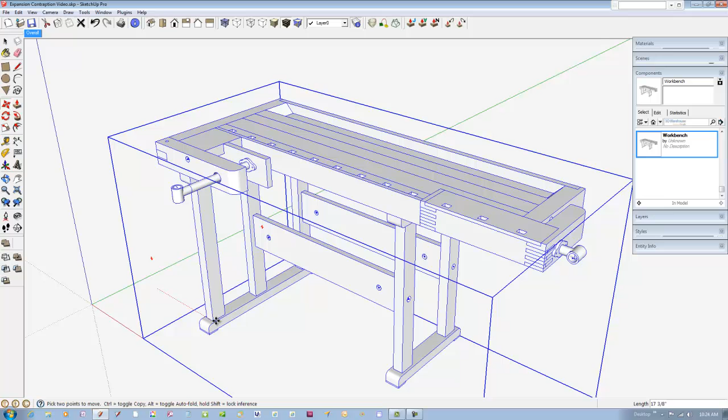To help design the adjustable support, I'll bring into the modeling space the workbench and also a copy of the dovetailed box that I need to hand plane after glue up.

I need to rotate and position the box into the desired location between the workbench dogs.

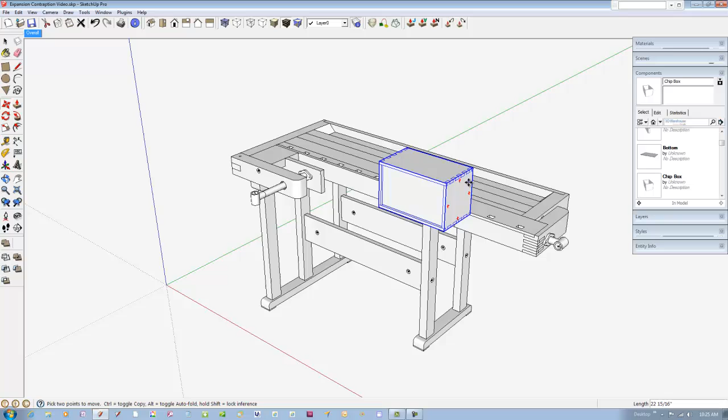Start the design of the adjustable support from this camera position. Using the line tool, draw the rectangular shape of the stile that is 2.5 inches wide and 1 3/4 inches high.

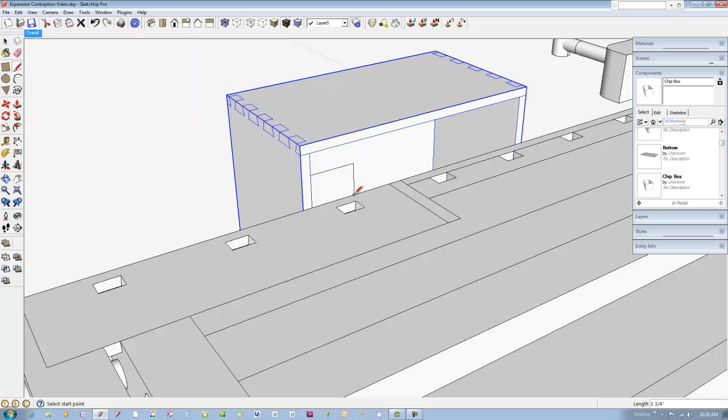Make the shape a component called stile.

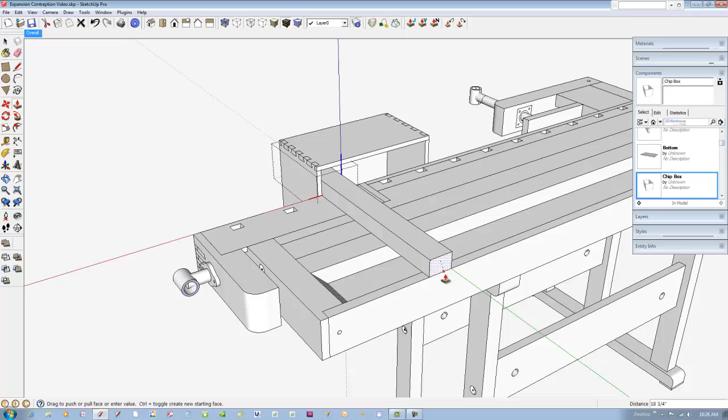Use the push-pull tool to extend the stile back into the box until it touches the bottom of the box. Then continue the extension of the stile out to the back edge of the workbench.

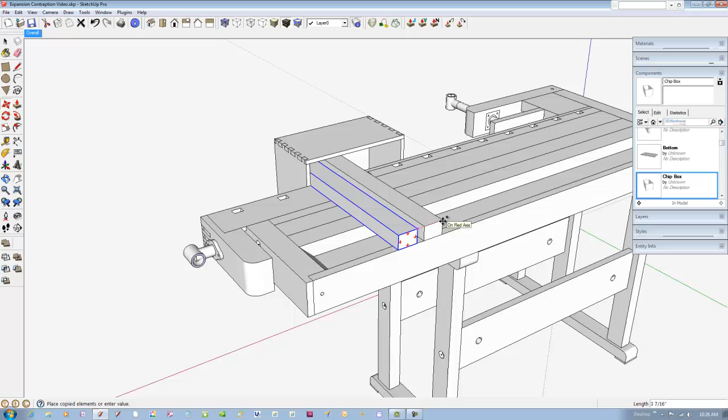Copy the stile to the other side of the dovetailed box, and flip that copied stile along the red axis.

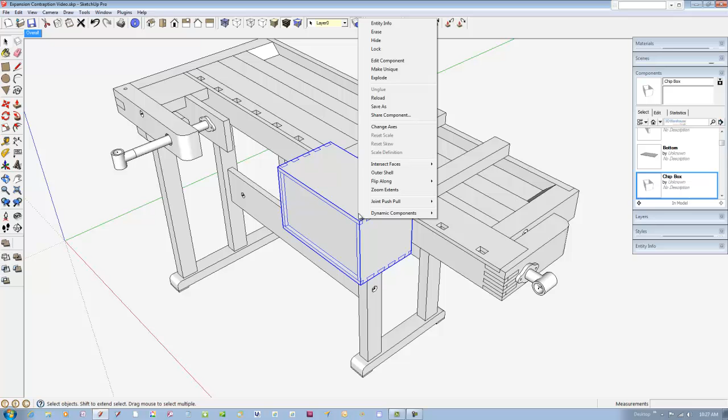Hide the dovetailed box temporarily to allow full access to the stile.

Create 2 through mortises in the stiles. Place guidelines to locate the position of the mortises. One is 7 5/8 inches from the front edge, and the other is 21 7/8 inches.

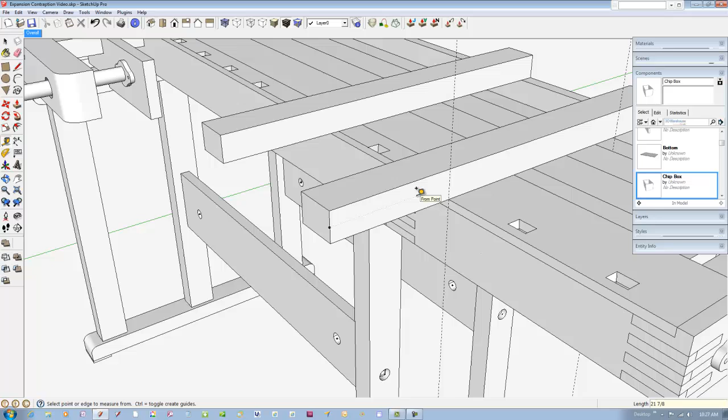Draw vertical parallel guidelines to show the width of the mortise, which is 2 inches.

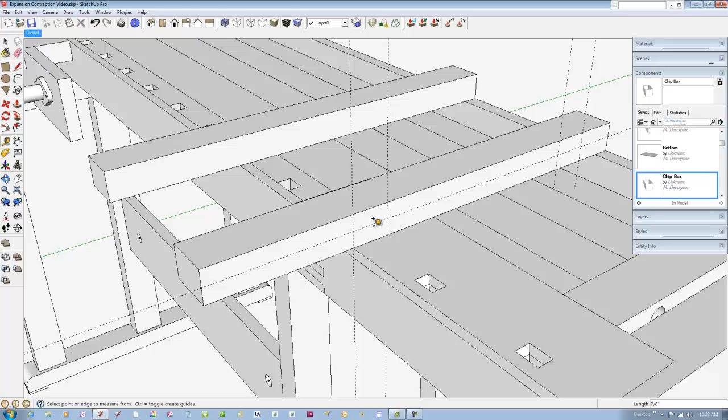Also place a horizontal guideline showing the center line of the stile. Finish the sizing of the mortises with guidelines 3/8 inch off the center line.

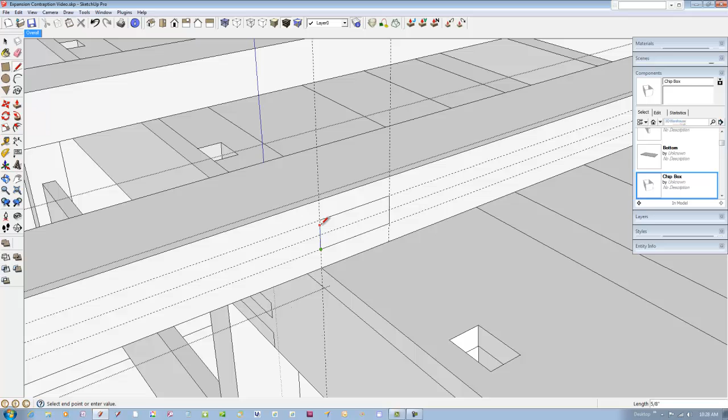Pick the line tool or rectangle tool and trace over the mortise face. Use the push-pull tool to push out the waste.

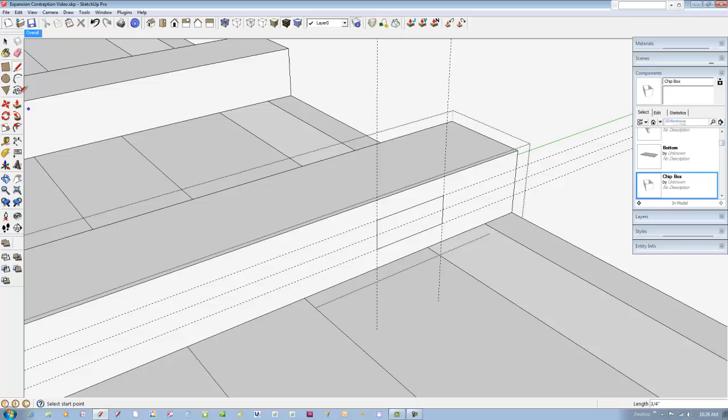Use the eraser tool to remove the guidelines.

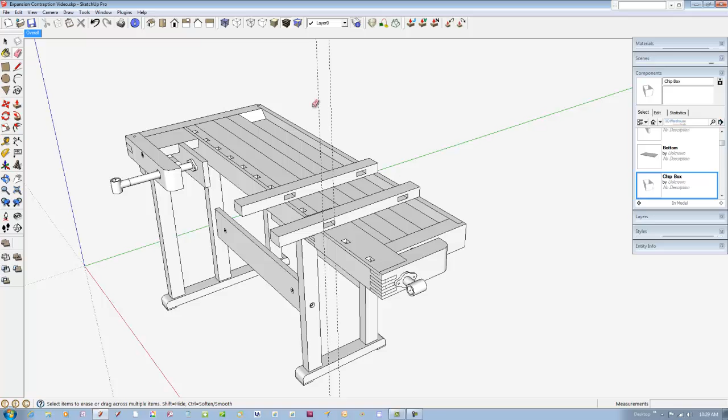Orbit around to begin the design of the rails.

Draw a rectangle around the mortise. Double-click and make this a component called rail.

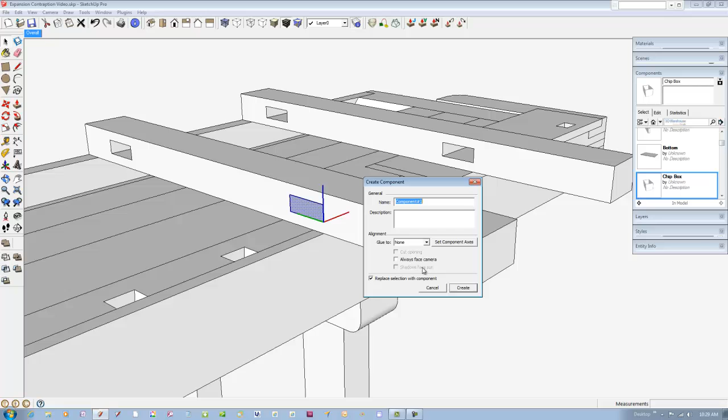Then use the push-pull tool to extrude the rail's length of 20 inches.

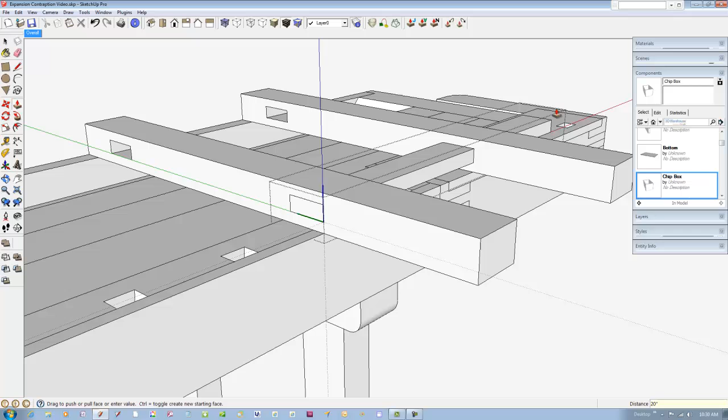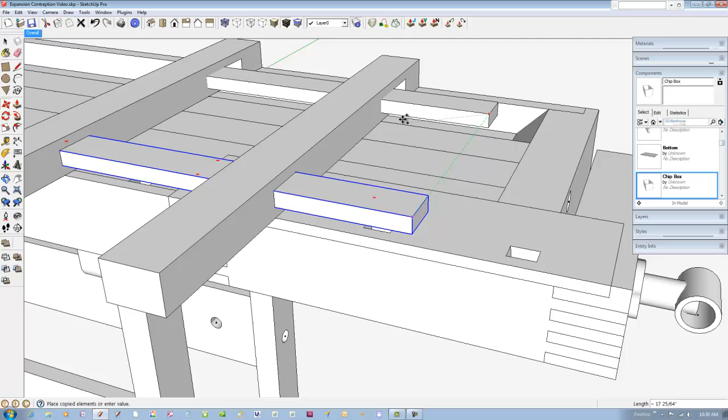Copy the rail to the other location on the stiles, and flip the rail along the green axis.

To locate the position of the peg holes in the rail, place guidelines 1 1/4 inches from the end of the rail. The holes are also spaced at 1 1/4 inches apart.

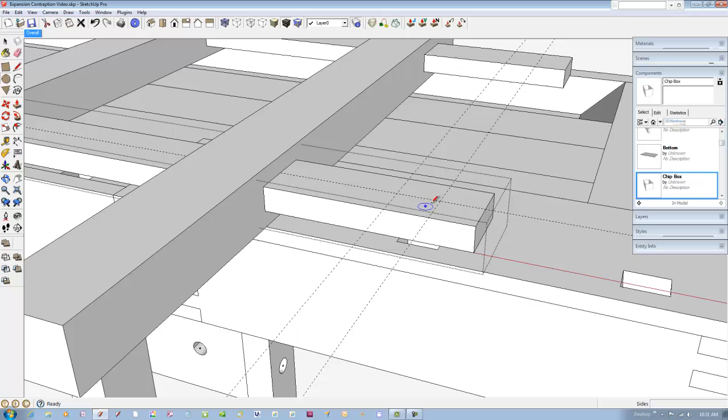Pick the circle tool, edit the component, and place a 3/4 inch diameter circle on the center location. Use the push-pull tool to complete the hole in the rail.

With the select tool, draw a select box around the first hole. Pick the move tool.

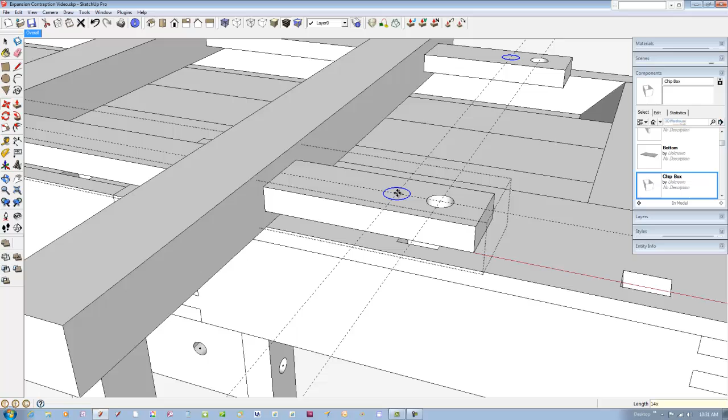Tap on the Control key, Option on the Mac, and move the copy of the second hole to its location designated by the guidelines. Type 14X and the remaining holes are automatically repeated along the top face of the rail with spacing of 1 1/4 inch.

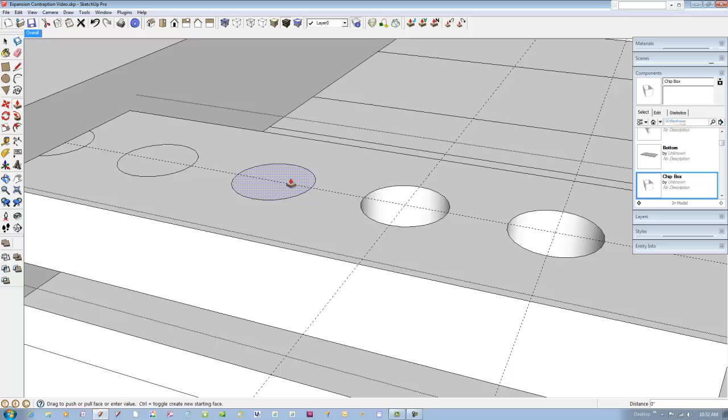Unfortunately, you cannot delete the covering faces on the holes without taking further action to force the cutting of the new circles into the faces.

I use the line tool to trace over a circle element, not the face of the hole. Now the face of the hole can be deleted.